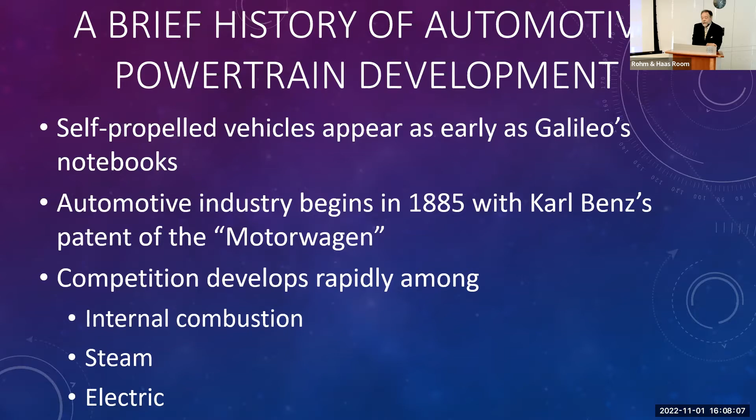Although Benz's motor wagon ran on an internal combustion engine, very quickly steam, or external combustion if you will, and electric motors became very popular. In fact, electric vehicles outsold steam and internal combustion engines cumulatively from about 1885 to about 1900. So the first big technology was actually electric motors in vehicles.

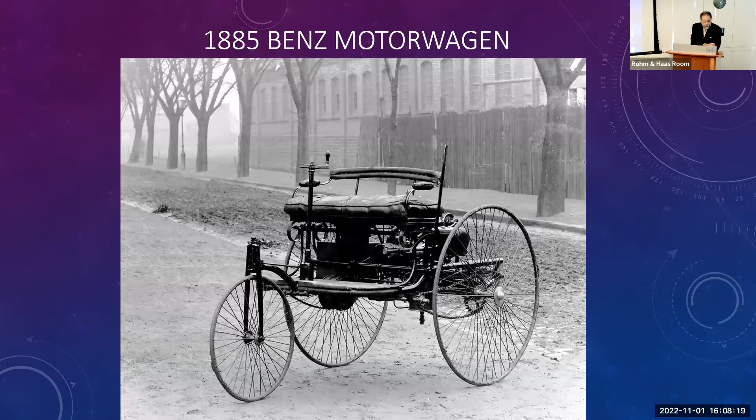There's a photograph of Benz's three-wheel motor wagon from 1885, the beginning of automotive, and it was an internal combustion engine. It has a lot of advantages. As it says here, it can run on a variety of fuels, and it's relatively inexpensive. Internal combustion engines are made primarily of iron and aluminum, two of the most abundant metallic elements in the Earth's crust.

I say relatively reliable. Nothing was terribly reliable in those days, but if you understood the basic principles, getting down and crawling under and getting it running again was part of the sport of motoring, what we would now call an extreme sport, motoring in those days.

Because the energy density of these, particularly liquid fuels, is so high, you got good range from the beginning. You can go a long way on a single tank of gas or diesel or whatever. It turns out you can burn just about any fluid, and it's easily refueled very quickly, as fast as you can pour from one container to another. And the nice thing about an internal combustion engine is you have power available to the wheels on start.

Downsides: the internal combustion engine has a limited range of RPM, and it develops its highest power at higher speeds. So to get power to accelerate, you need to run the engine quickly while the car is going slowly. And to get power to maintain speed, you need to run the engine quickly when the vehicle is running quickly. You have to vary the ratio between the engine and the wheels, so you have to have what we call a transmission. That's a given with an internal combustion engine.

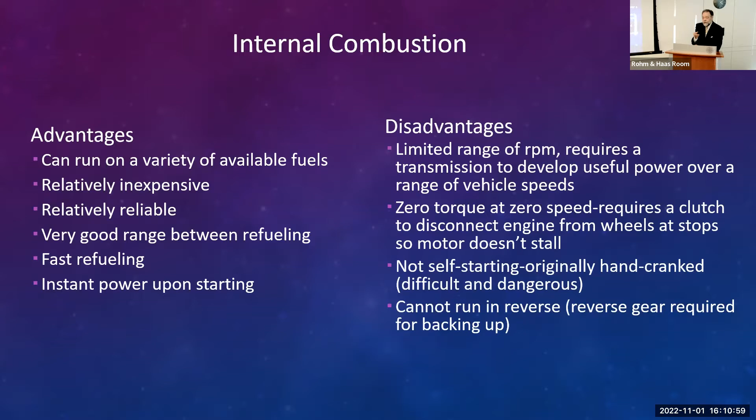And generally speaking, I realize there are some gimmicks out there, but generally speaking, the internal combustion engine can only turn in one direction. You can't run it in the other direction. So if you want to back up, you have to have a means of reversing the rotation as you send it onto the wheel. So yeah, more gears are required.

Well, here's the 1912 Stanley Steamer, or a modern restoration of one. Steam was pretty popular at the beginning, for a lot of reasons. I said the internal combustion engine is tolerant to fuel; the steam engine can literally burn anything that will burn to fuel a steam engine. Fuel quality is not of terribly much interest, at least in these days, before we worried about emissions and such.

It was a mature mobile technology in 1885. That's what steamships and railroads ran on, so it was well understood. And of course the steam engine itself goes way back beyond that. It generates high power at all speeds, so it can generate good power running slowly and good power running quickly. You don't need a transmission.

You have power available at zero speed, and you can run it backwards, so you don't need gears. The problem is it takes time when you light the fire in order to boil water. You all know the saying about a watched pot - it can take a very long time to develop power. It has the lowest thermal efficiency of the technologies we're going to talk about. Typically for these early cars, maybe 15% of the energy consumed by burning the fuel actually moved the vehicle. That's a non-starter for today. External combustion is just inherently low efficiency for mobile platforms. It has higher maintenance than internal combustion engines, and not only do you have to carry fuel, you have to replenish the water, or have an onboard condenser, which adds complexity and weight. You have two fluids to maintain continuously instead of one.

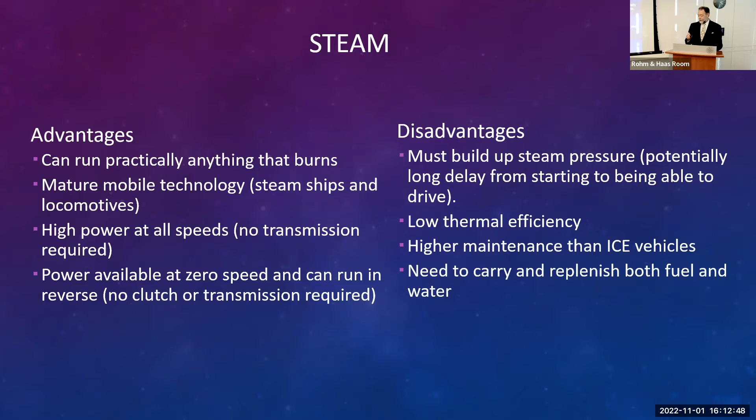Then we get to the electric motor, and again these were quite popular. This is a 1913 Rauch and Lang that I took a photo of in Spokane, Washington, I believe. I had the opportunity to not just view this from above, but while the docent wasn't looking, I crawled underneath and took this picture because I want to highlight the simplicity here. Here's this box - let me get my pointer going. There we go, that's the electric motor right there. It just runs on current from the passenger compartment - you increase, decrease, or reverse the current.

Here is the drive shaft, which comes into a worm gear, and what anyone familiar with rear-wheel drive vehicles recognizes as a standard differential. This is just a means of splitting the power between the two rear wheels so they can turn at different speeds when you're cornering. That's it - this is the entire drivetrain. It's quite simple, so that's a big advantage, as I talk about.

It generates high power at both low and high speeds, so a transmission isn't required. Some people are starting to add gears in order to improve efficiency of these motors so they can run closer to their peak efficiency more of the time, but that's optional. I think Porsche is the only one that has a multi-speed transmission in production. All the rest are single-speed - easy operation, low maintenance, high power at low speed. It can run in reverse, so the wheels and the motor can be permanently connected by means of the gear.

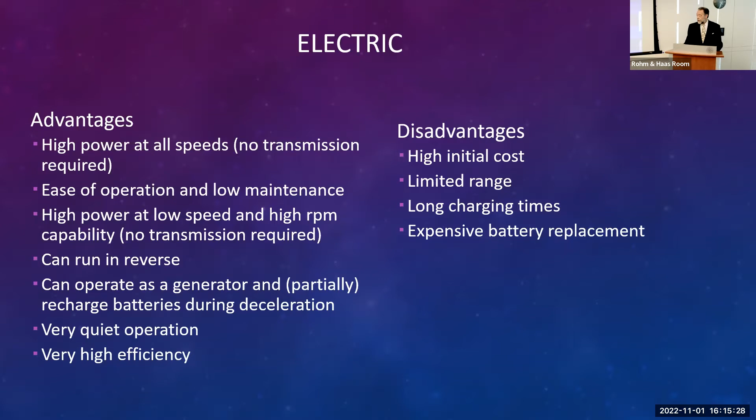Disadvantages - now we're talking about 1900 here. The disadvantages were high initial cost; these vehicles easily cost twice what an internal combustion engine did. Limited range, long time to recharge - a lot longer than it takes to fill a fuel tank. And if the battery needs replacement, those were inherently expensive because they're made of more complex and expensive materials than just iron and aluminum.

Okay, you may have heard this: who killed the electric car? Allow me to introduce you to the gentleman who killed the electric car. This is Charles F. 'Boss' Kettering, founder of the Dayton Engineering Laboratories Company, better known by its acronym DELCO, after it was acquired by General Motors, and he became the first head of GM Research. He did not invent - I see this in print that he invented the electric starter - he did not, I want to be very clear about that, but he developed the first mass-produced electric starter.

And that was pretty much the end of electricity for cars, because up until then the biggest danger was hand cranking the vehicle. It was inconvenient, it was dirty, it was quite dangerous - broken wrists and forearms were common. Now that you didn't have to do that anymore, along with the automatic transmission which came on later, the electric car was already dead at that point. You no longer had to manually adjust the gear ratio between the engine and the wheels - it was done for you.

We have a dearth of electric vehicles from about the late 1920s up until 1996. I will somewhat parochially attribute the rebirth of the electric vehicle to the GM EV1 in 1996. Toyota very quickly followed with an electric version of their RAV4 in 1997. Ford bought a Norwegian company called Think that was making electric commuter cars about the same time. Within about 5 years, all three of those companies abandoned electric vehicles again. Certain things just weren't quite ready for prime time, but they never left the public consciousness. The idea that electric cars were possible and possibly even practical caught on about this time.

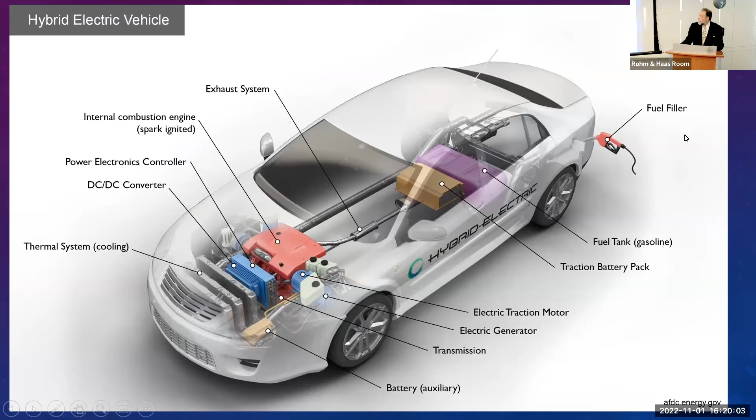This is a full hybrid vehicle. What we see here is you have your conventional internal combustion engine, and then you also have your electric generator, and you also have your battery pack. Just notice the relative size of the battery pack here, but the only place that we put anything into this vehicle is through a standard fuel filler.

For the plug-in hybrid, in addition to a somewhat larger battery pack and the fuel tank, in addition to our fuel filler, we have a charging port where we can charge that battery. Typically these vehicles are able to run somewhere around 40 to 60 miles, surely less than 100 miles, on the battery alone before the internal combustion engine kicks in, because of the size of the battery pack you can accommodate while fitting all this other hardware.

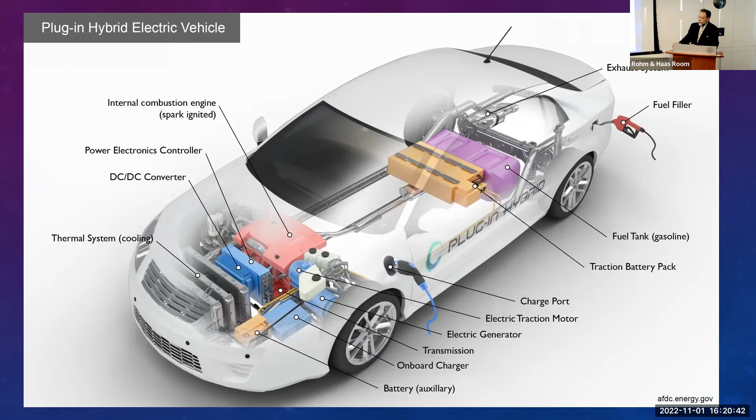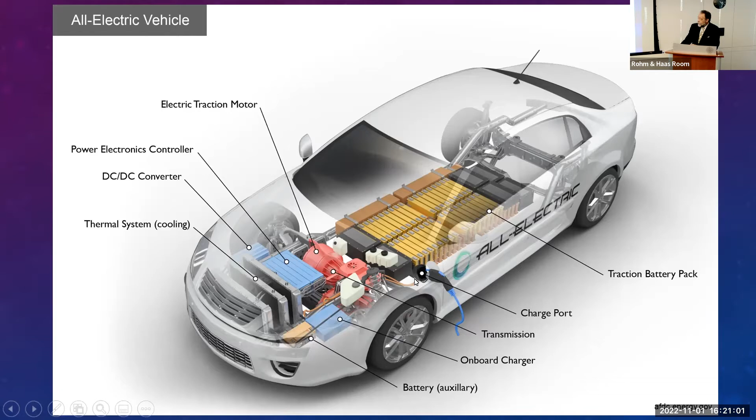But if we do away with the gasoline engine altogether, now we need a much larger battery pack. You can see it typically occupies the entire floor of the vehicle. But now we've done away with our fuel filler port, we simply have our charging port. So that's basically been the progression. What we're going to see is that the pure electric vehicle is becoming, it's going to overtake the hybrid. Right now they're more or less neck and neck in terms of sales.

You can buy either one. But I want to focus on what makes the electric vehicle possible, and that is the electric motor, which is a device that converts electrical energy into mechanical energy. That's basically it. And this is an example - this is the motor here, and what you see here is the gears that I mentioned before.

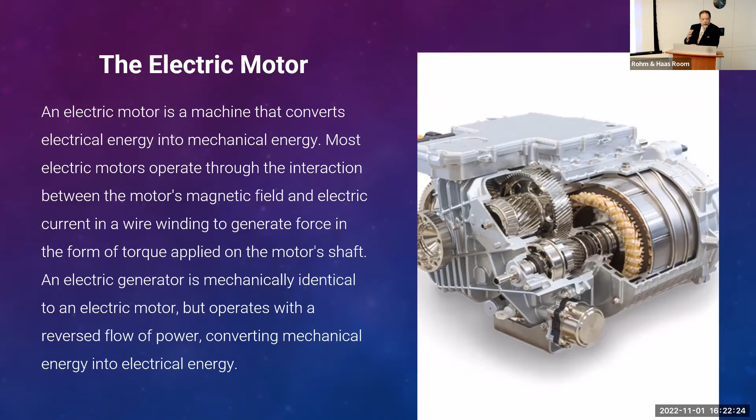Typically, a motor of the size that can operate an automobile has a top speed of somewhere around 18,000 to 20,000 RPM. That's fairly typical of these machines. A car going down the freeway at about 60 miles an hour, the wheels are turning at about 1,000 RPM. So we don't connect the motor directly to the wheels because to get peak efficiency, we run around half to two-thirds speed, meaning we want the motor turning around 9,000 RPM when going down the freeway. So this is a reduction gear, typically somewhere in the 6-to-1 to 10-to-1 range, and usually permanently connected to the wheels.

So how does this work? Well, I mentioned repeatedly that electric motors are very simple, so let's build one. What I have here is one of these rare earth permanent magnets in the shape of a disc.

What an electric motor does is use the interaction between an electric field and a magnetic field in order to generate a force. So my source of magnetic field in this case is a permanent magnet. My source of electricity is going to be a standard 1.5 volt Duracell battery. And in order to get that current flowing, I need a current path. This is a copper wire, which I've bent into this more or less weird shape. The important thing is it has to make contact with the battery at the top and the magnet at the bottom. And if I've done this right... little tricky. There we go.

It illustrates several very important points - not least of all, I'm going to leave this out here so if you want to play with it. The neat thing about it is when I did this, you'll notice I didn't have to push it to get it started. It starts by itself. So that's a big advantage this has over the internal combustion engine.

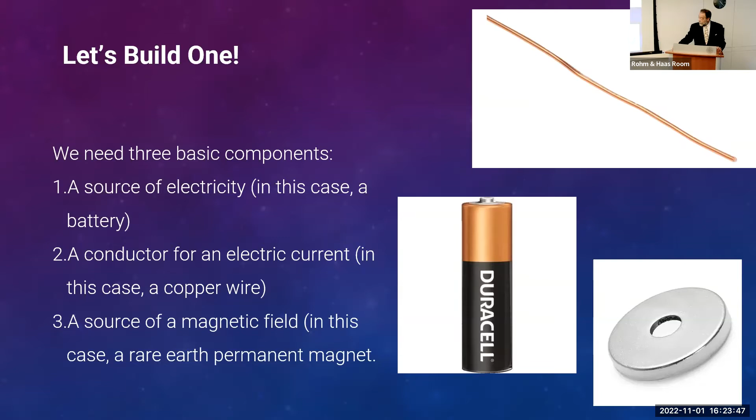It works by means of this interaction between the magnetic field, represented here by the vector B, the electric current by the vector I, and the mechanical force that is generated, the vector F. It's simply the cross product between the current and the magnetic field. I'm not going to get into vector geometry here - just treat that as a multiplication sign for now. Ideally, what we want is for the current and the magnetic field to be at right angles. That's where you get the maximum interaction.

And if you do that, you get a force. If my current is running to the right here, by the good old right-hand rule, and my magnetic field is coming out of the board, the force will be upward. Basically, they're three orthogonal, or mutually perpendicular, vectors. So this gives us the basis of the electric motor.

If I want a lot of power, what I want is a good, strong magnetic field - I want B to be big, and I'll talk about how we achieve that. We want a lot of current, so we have not just a single wire in most of these motors, but lots and lots of wires wound together so we can get a lot of current going in order to generate a force.

Another nice thing, compared to the internal combustion engine and the steam engine, which typically are reciprocating engines - a piston moves back and forth, and then we have to convert that motion into the rotating motion of the wheels, so we need a device called a connecting rod and crankshaft to do that, which is more hardware. The nice thing about these motors is they can be constructed, as this one is, to generate rotational energy directly. So we don't have to convert the back and forth into rotation, aiding the mechanical simplicity greatly.

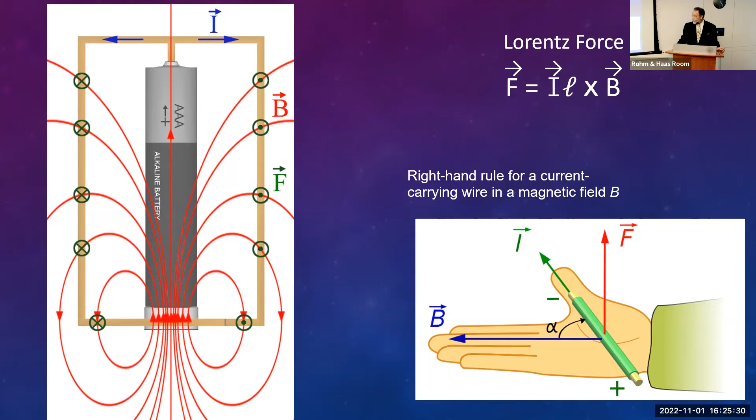And this was just an illustration. These are two different General Motors products. On the left is a Corvette engine, roughly from 2009. About 200 parts go into making that engine.

This gets into the argument of what's a part - is an engine block a part, or is it a casting plus plugs, screws, and a whole bunch of inserts? We can go on, but the point is this is a whole lot simpler. The electric motor, which generates torque or rotational energy directly, is a whole lot easier.

This particular motor is using rare earth permanent magnets, which you can see inserted into the slots. A bit of nomenclature: the part that rotates in the motor is called the rotor, simple enough. The part that houses the rotor and doesn't rotate, that remains stationary, we call the stator. So we have the stator and the rotor.

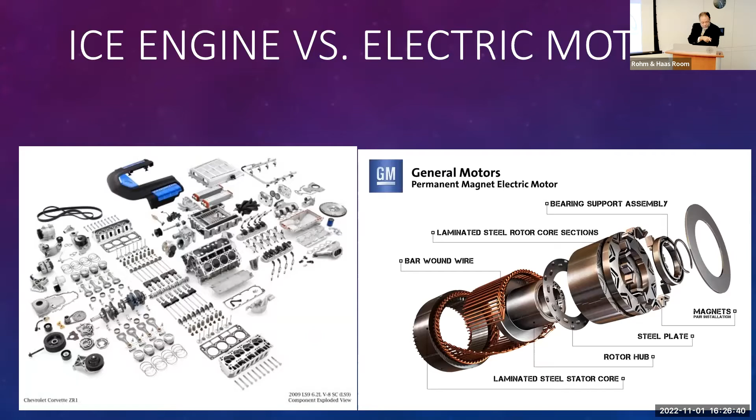That's pretty much what I have here, except in my case the magnet is the stator and the current carrying component is the rotor. We usually reverse that - I'll talk about why we do that. These are the basic components of the electric motor, the rotor and the stator.

As I mentioned, we need to have both an electric current and a magnetic field for this to work. One way to have that magnetic field is what I illustrated, where the rotor has permanent magnets mounted in it.

But if you recall a fellow by the name of Tesla, whose name has also been in the news of late, he basically exploited the fact that an electric current moving through a conductor also generates a magnetic field. So another way to generate a magnetic field is by having current flowing not just in the stator, but also in conductors in the rotor, which then induce a magnetic field that can be used to push the rotor around. So we have these two basic types: the permanent magnet motor and the induction type motor.

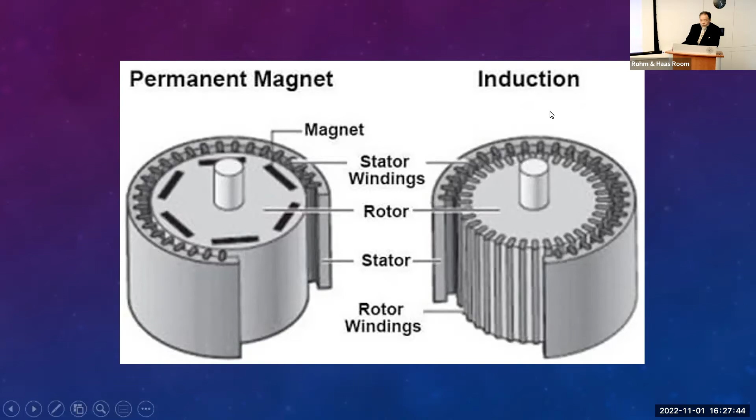I want to talk about their comparative advantages and disadvantages. When the magnetic field is generated with permanent magnets mounted in the rotor, we don't have to provide electrical energy to the rotor to get the magnetic field. We don't have to have an electrical connection to the rotor and maintain it in this moving part. It's much simpler.

It's also more efficient, because in the induction motor, to generate the magnetic field in the rotor, I need current. I need a way to keep that current flowing as the thing is rotating - brushes or brushless motors, whatever - some form of continuous electrical connection. And since I'm running current through wires of finite resistance, I'm using energy. The induction motor of the same size is always going to be less powerful and less efficient than a permanent magnet motor of the same size.

So if I want the same power output in my vehicle using induction, I need a bigger, more expensive, less efficient motor.

But this is the part they never tell us about when we're studying engineering, and we really should. These permanent magnets are based on rare earths like neodymium, dysprosium, and terbium, whereas induction motors are based on steel and copper. Steel and copper we buy on the order of tens to hundreds of dollars per ton. These rare earths - last time I checked, neodymium was going for hundreds of dollars a pound, dysprosium twice that, and terbium ten times that.

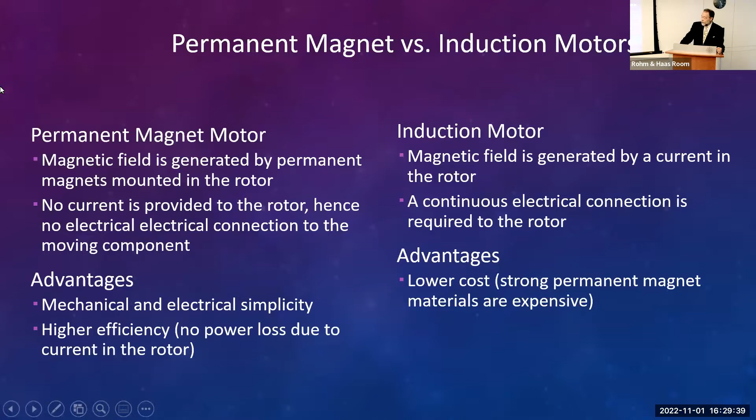We may only be talking about a few pounds, maybe 8 or 10 pounds of magnets in these motors, but that's a lot of rare earth, and they're considerably more expensive. Nevertheless, what's really driving all of this is efficiency - we want our vehicles to have the greatest possible range in a given package, so we want them to be as efficient as possible.

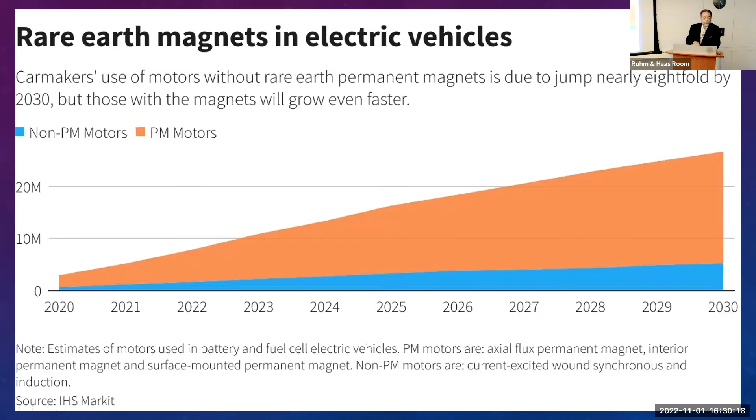At least one source is forecasting growth in both non-permanent magnet motors, which are the induction motors, and the permanent magnet motors over the next decade and a half or so, showing where we've been. Both will continue to grow, but the permanent magnet motor is by far the solution of choice in the industry.

I want to talk about what's gotten us to this point, and one reason why I think the electric motor is the ultimate solution. The important point about these two charts: this is the efficiency of an internal combustion engine vehicle on the left, and an electric vehicle on the right.

The left-hand chart we read left to right, and the right-hand chart we read right to left. Starting at the two outside bars, that's the total energy we're putting into the vehicle. I'm not getting into extracting oil and refining it, or how we make the electricity, whether through fossil fuels, renewables, or something else. The point is, we load the vehicle with 100% of some form of energy.

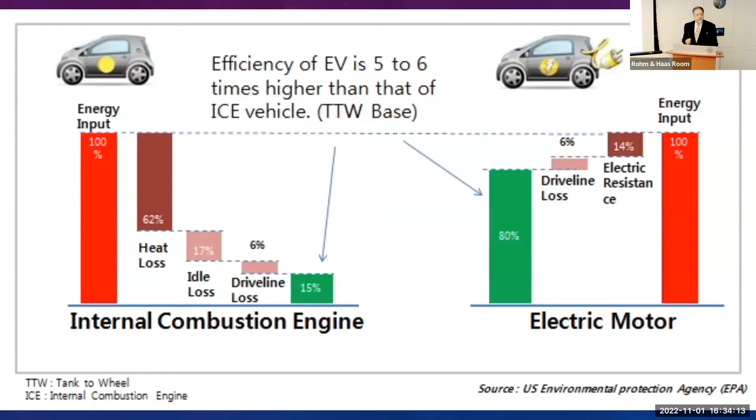Some countries have actually set out formal goals for doing away with emissions from internal combustion engines, and you can see them broken out in color codes. China appears a couple of times here. In 2035, they're basically saying they're not going to sell internal combustion engines anymore.

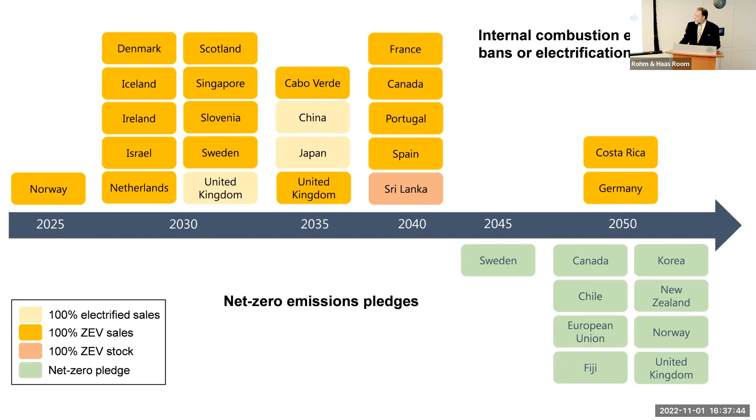Because, well, durability and reliability have been driving the market for a very long time. But now, since you mentioned electric vehicles, let me talk about that.

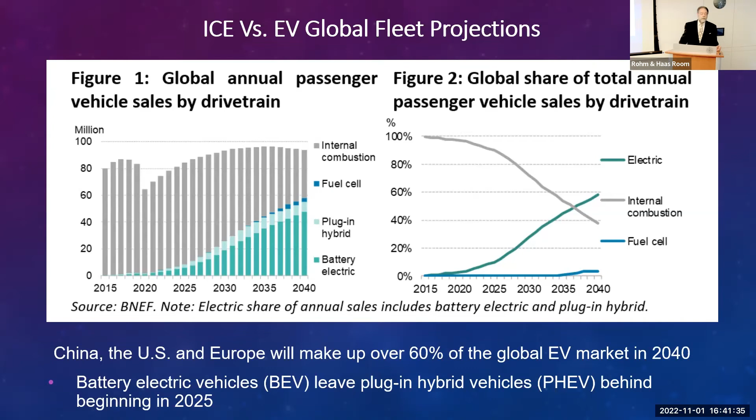And this is the same data on the right here. What we basically see is the share of internal combustion engines falling, that's the gray bar, the share of electric vehicles rising, and the crossover taking place somewhere around 2037, where electric vehicles start to outsell conventional vehicles. And you see this dark blue bar at the bottom here, labeled fuel cell. I will say a few things about that.

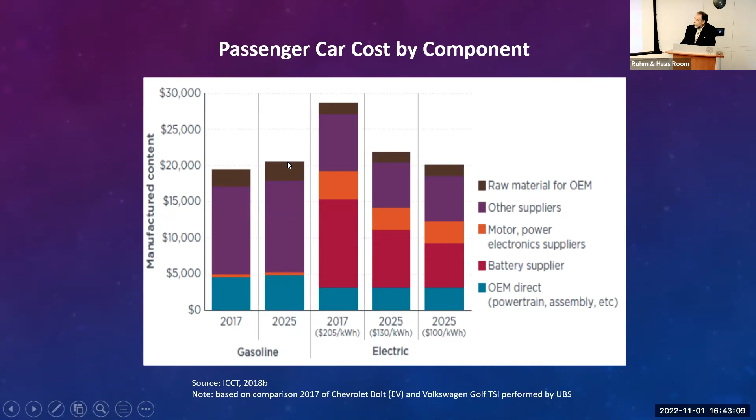If that gets down to 130, there are two different forecasts here. What we see is the price of the electric vehicle now also being in the low 20s. And the magic number that everybody keeps throwing around is $100 per kilowatt hour. If we can get to that by 2025, now look at where the electric vehicle and the gasoline vehicle in 2025 are. They are now the same price.

The type of batteries that we are familiar with in our cars are the old lead acid batteries, which were the power plant for electric vehicles right up through the GM EV1. The first EV1 ran on lead acid batteries. Limited range, high cost, and long charging times. Now we're using these lithium-ion batteries. They cost more, but they have better energy density and they can be charged faster.

But another concern we have is charging time. We have all gotten very used to the idea of driving our vehicles over long distances, and if fuel gets low, we pull off into a convenient fueling station, and in a matter of minutes, we're back on the road with our charge renewed.

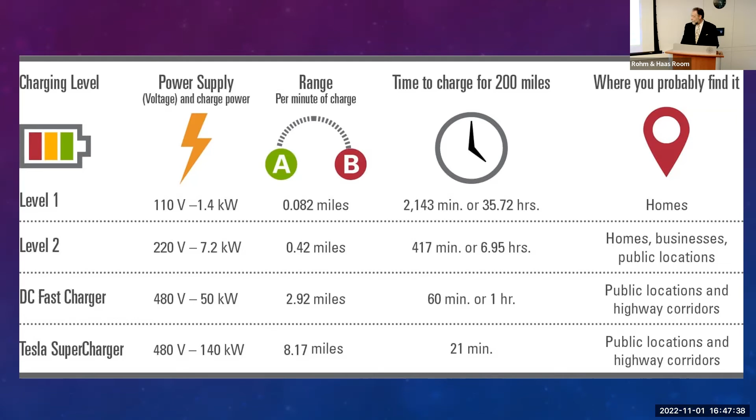Those are the ones that he has out right now, like in the Wawas. Yes, they have a Tesla one.

Okay, and I want to talk about why he can do that, because the enemy of batteries is heat. And it's not the heat that it generates while it's running, it's not the heat while it's parked, it's the heat that's generated while charging. Anytime you push current through components of finite resistance, you generate heat. And these batteries do not like heat. If they get too hot, the electrolytes are flammable. It's bad news if they catch fire.

Now, fires are not that big a deal in terms of frequency. In fact, electric vehicle fires, even on a per unit basis, are still less than gasoline fires. But they get the headlines because they're new. And they are actually harder to extinguish. So there are legitimate concerns about it.

So how do we cool the battery while we're charging it? Well, the Nissan Leaf, which until recently I think was the largest selling electric vehicle in the world, I think it has since been surpassed. But you hear about Teslas and things like that, Nissan actually had the best-selling one. It uses an air-cooled battery, and it can only use level 1 and level 2 chargers because you just simply can't get the heat out fast enough to charge it faster.

Nearly every other manufacturer except Tesla cools the battery pack by what I call indirect cooling, meaning the battery pack is a sealed container, and what they do is they have plates that butt up to the battery pack with coolant running through them to extract heat. So this allows you to get to the DC fast charger at the third level we talked about, but still, since you're relying on the thermal conductivity of the battery and the electrolyte to pull heat from the center of the battery, you can only do that so quickly.

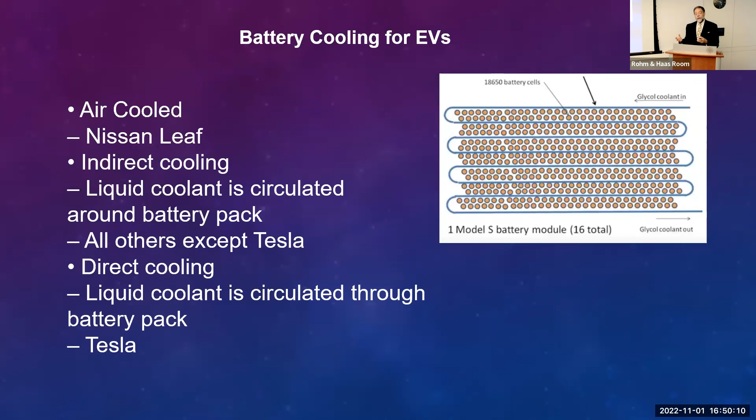Tesla's big innovation is to circulate coolant among the cells and actually pull heat out, which enables them to go to that very high speed charging. And that's why those high speed chargers can only be used, at least in their high speed mode, on Teslas, because only Tesla has this direct cooling ability. So there are various legislative actions being taken to allow other vehicles to plug into the Tesla supercharger, but if they do, they still won't be able to use the very highest charging rates. They'll be limited by the ability to cool their batteries.

I often ask if anyone wants to take issue with that. Nobody really disagrees with that. This came out of a textbook I have on my shelf from 1924. So in 2 years, we're going to celebrate the 100th anniversary of us running out of gas. We've been running out of gas for a very long time, but what keeps happening is we find new and innovative ways to extract more of these fossil fuels. Maybe we're somewhere near the end of that.

We clearly have reached the point where it's not as cheap as it used to be. And actually if we're going to continue to have mobility, we need to consider these alternatives.

I've talked a lot about electric vehicles, particularly battery vehicles. There are at least 40 companies out there selling battery electric vehicles. There are at least 300 claiming to be in the business of selling electric vehicles, but they have not yet built or sold one. So there's going to be a lot of shakeout in this space in the next few years. It's going to be really exciting to watch.

But the internal combustion engine isn't going away, I've already mentioned. At least, even if we stop selling them today, it's going to be around for a couple of generations. And there are other innovations we can use.

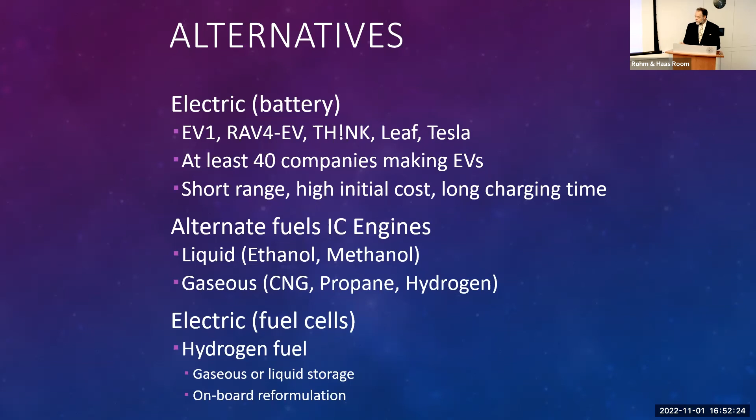But we've tried that, and I want to talk about one other way of using hydrogen to make electricity run an electric motor, and that's the fuel cell.

Again, not saying it's fun, but the interesting thing about hydrogen is Argonne National Laboratory did a study on hydrogen as a fuel and concluded that it is at least as safe, if not safer, than gasoline and diesel fuel. And I like to have this thought experiment.

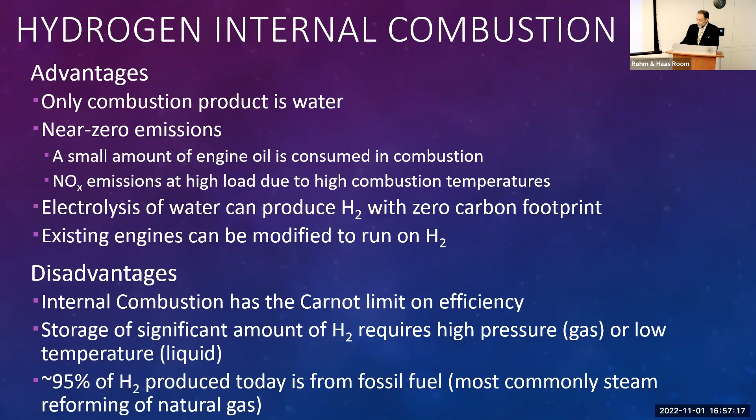But there's a more efficient way to use this, and that's not to burn it at all to make heat and then make electricity. What we do is react the oxygen in the air with the hydrogen from our storage facility in such a way that we directly transfer the electrons to make that chemical bond through a conductor, so that we're not generating heat, but generating electric current directly. This is called a fuel cell. It does not have the problem of the Carnot cycle.

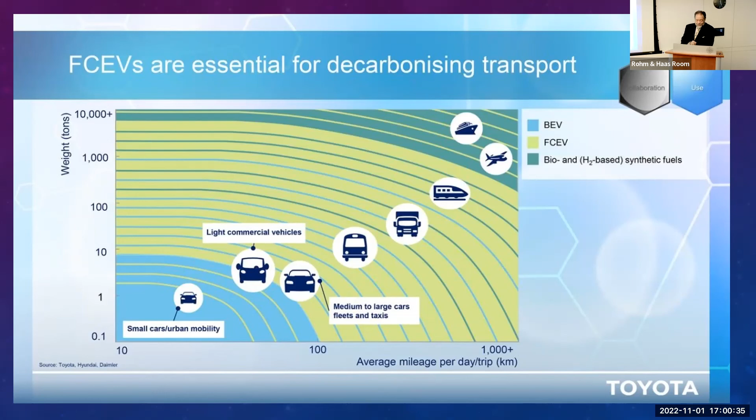You're going to moderate for me? Yeah, and what we'll do is alternate questions between the present in-person audience and the online audience. So we'll take the first.

The magnets and the rare earths - are we going to be at a place where that's going to grow versus induction? Are we going to get to a place where we can't get the raw materials, or it gets so expensive that it prices it out?

So the question - should I repeat it, or are the microphones operating? Okay, the question was the source of the rare earth materials for the magnets - what's going to happen as demand grows so rapidly? That issue has been around for a couple of decades. In fact, one of the things I worked on at General Motors, some of my last projects, was on these electric motors and specifically the rare earths. There has been a diversification of the source of rare earths. In 2010 or so, about 95% of the rare earths came out of China. That's down to around 75-80% now, with other mines operating around the world, and there are a few.

A lot of those are in conflict areas. Yes. Essentially, it's going to come down to what people are willing to pay for it. I don't have great insight as to where that's going to come from. There are plenty of rare earths - in fact, the total weight of rare earths in the earth's crust, if you add them all up - dysprosium, neodymium, terbium, et cetera - is about equal to that of copper. Copper is hardly considered rare. The difference is these rare earths don't concentrate in useful ore bodies as readily, so there are fewer places where it can be profitably mined. To get a pound of some of these rare earths, how many tons of ore?